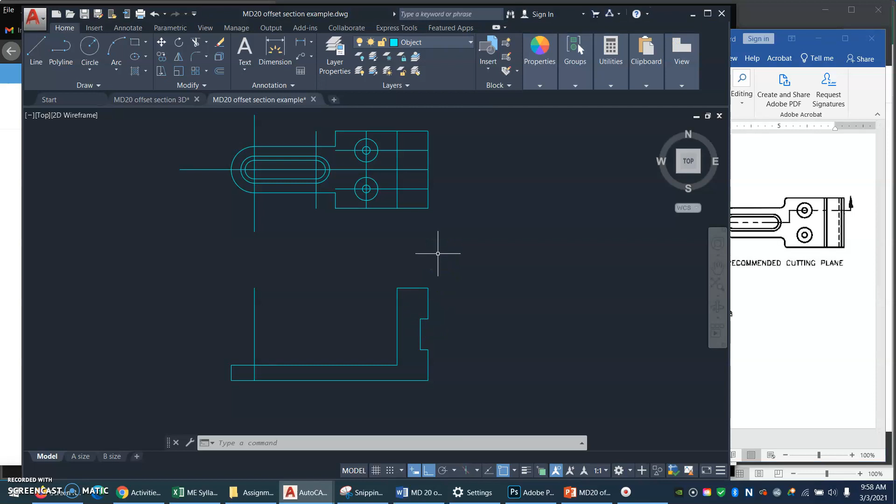So where is the chamfer? It's hiding under the fillet. Click that down arrow. Chamfer. All right, select first line. No, I don't know the distance yet. So click distance, and it is 0.125. Enter. Second distance is the same because it's a 45-degree thingy.

Okay, now I can click, click, enter to bring it back. Click, click, enter. Click, click, enter. Click, click, enter. Click.

Click, enter. All right, how about a fillet radius in there? Do we know how big that is? Unless otherwise specified, all fillets are a radius of 1/4. Right. Well, here's one that's otherwise specified. This outside corner here is not 1/4. The others are. So let's do this.

Let's get a fillet. So now it's hiding under the chamfer. Fillet. R for radius. 0.25. And what have I got? That is a fillet. That is a fillet. Oops, got to bring up the command again. Enter to bring up the command. Click those 2. Enter to bring up the command.

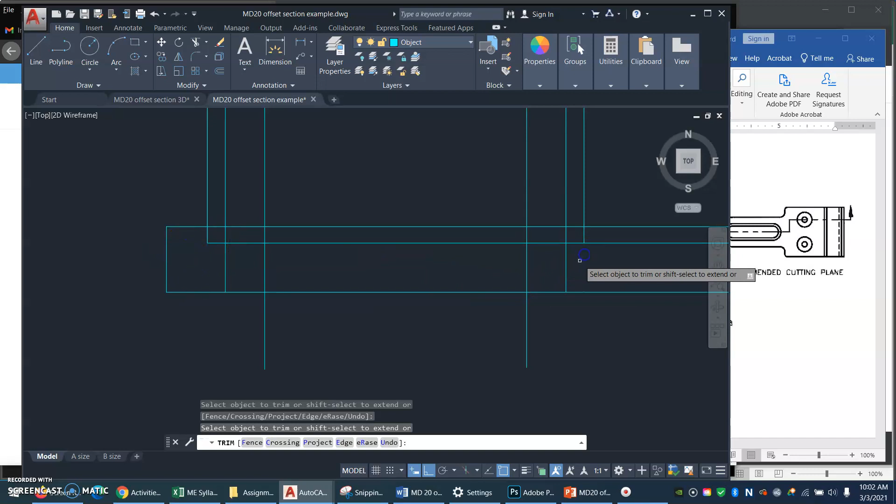Okay, now this counter bore is 1/8 of an inch thick, so O for offset, 0.125, and offset. Let me zoom in on my slot here so we can see what's happening, and let's do TR for trim. Enter again. I'll just use everybody for a, what you call it, cutter.

And I'll use a right crossing window to trim those guys up, and I'll trim that out of there. Oh yes, and now I'd like to move these to a hidden layer, so I'm going to select all those lines and then just go up here and click hidden. Great, and now I'm going to select these two lines and go up here and select center to move them onto a center layer.

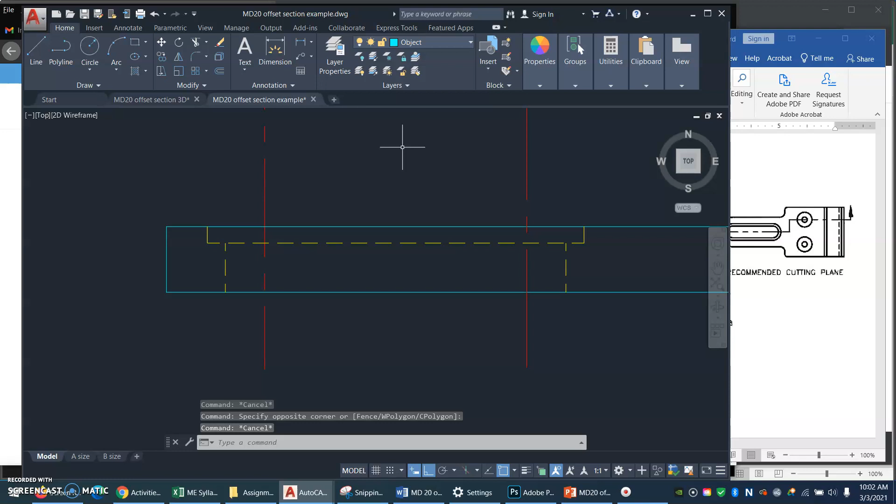All right, let's get our counterbore holes here. I'm just going to run... I could use offset if I wanted to. I'm just, what do you call it, running lines down.

Okay, and this one has a counterbore that is 3/16 deep, so 0.188. O for offset, 0.188.

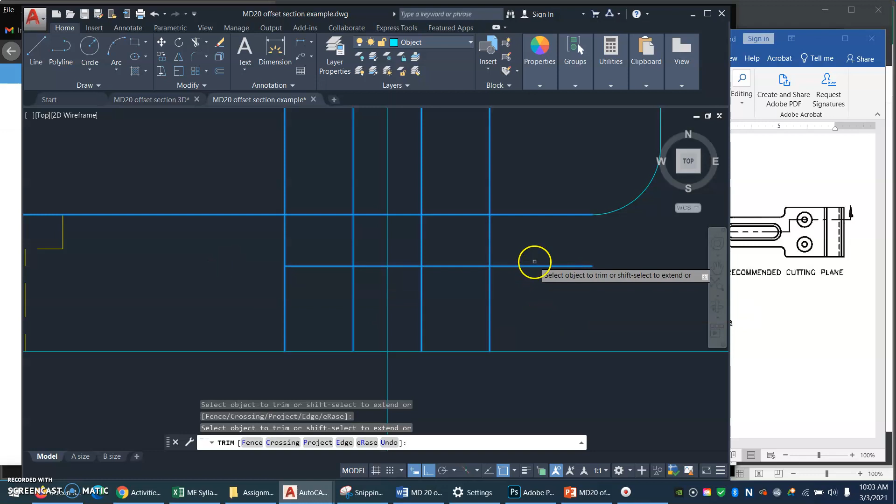Offset that line. Okay, now I'm going to come in here, zoom in close, and do TR for trim. I'll just hit enter to select everything as a cutter. Oh, that's probably stupid. Yeah, probably should. TR for trim, I probably would be smart to use these. Okay, so there's that.

Trim these. Trim that. Da-da-da-da-da. All right, now I'm going to select. That is a weird looking hole. The counterbore is large relative to the hole.

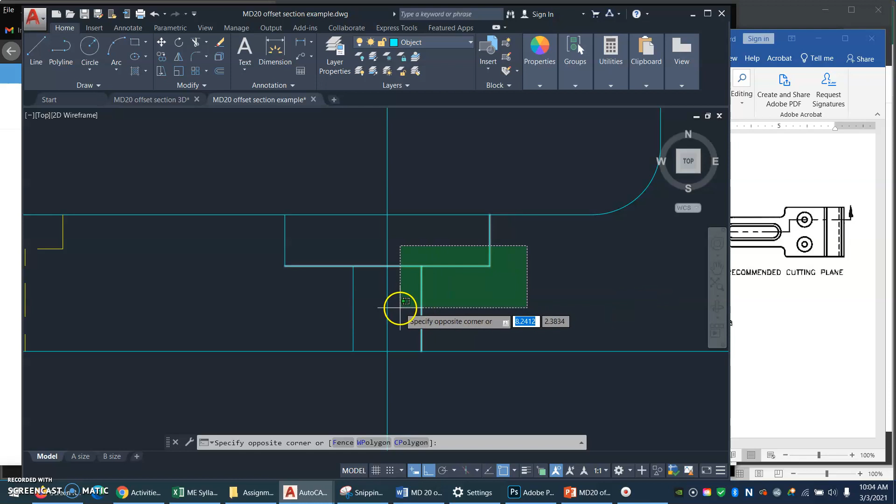I'm going to use a right crossing window to select these lines. Now they're selected. Now I'll come up here and click hidden. Escape. Now I'll select this line and come up here and select center. Great.

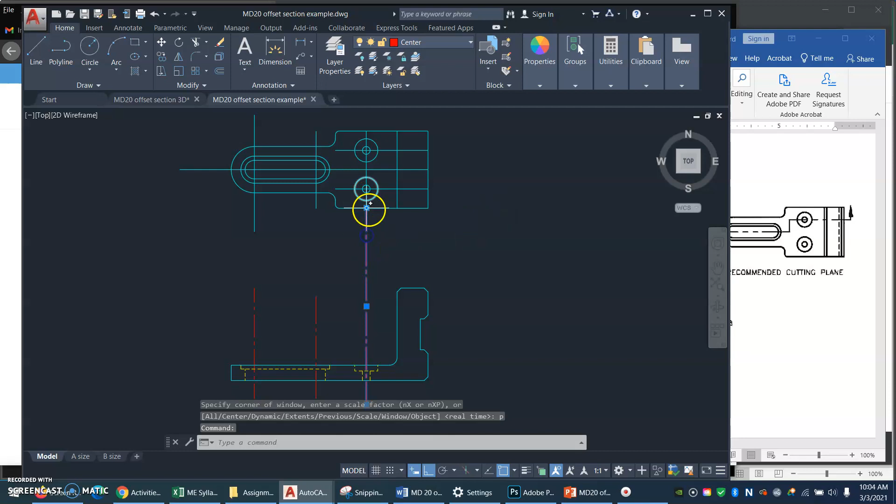Now, before I do too much, let's think about our cutting plane line, shall we? So here's our cutting plane line. If I were being careful, I might measure a nice distance out beyond there, but I want to make sure we have time to look at these, so I'm just going to eyeball it for now.

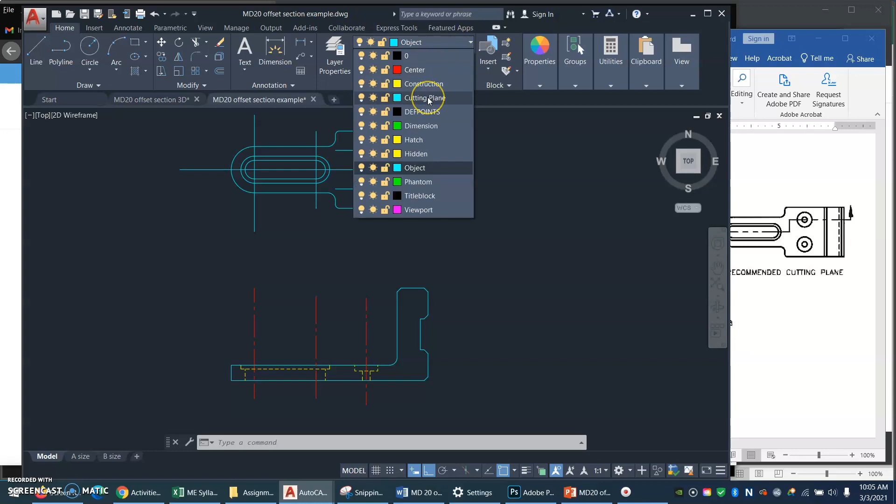I'm going to switch to the cutting plane layer, which is a thick phantom line. And what am I going to do? I'm going to extend this line out a bit. Okay.

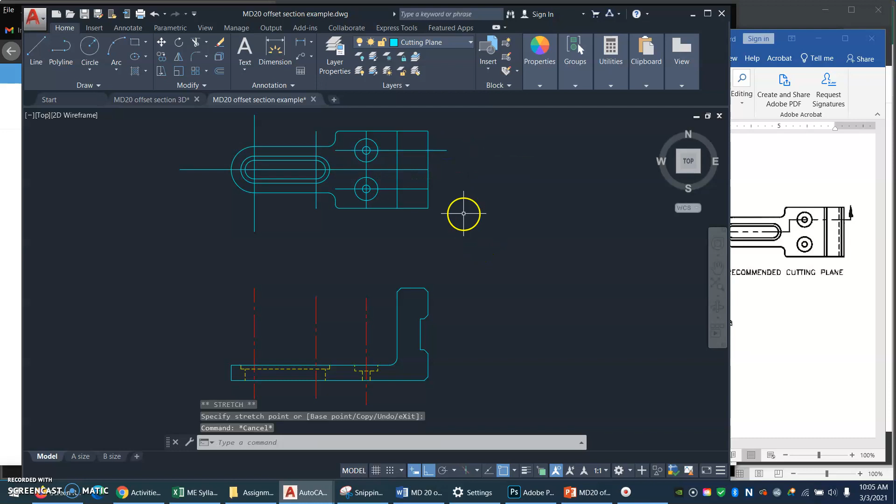Now, I need a leader style. So I'm going to go to the Annotate tab. Let me make this a little bit bigger. To Leaders, and get the leader style. There's the standard style. I need a new leader style. Leaders. Cutting plane. Continue.

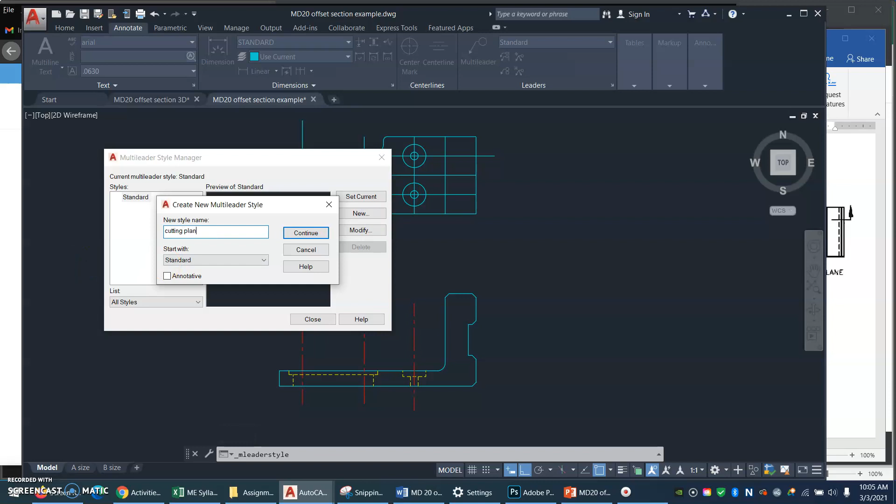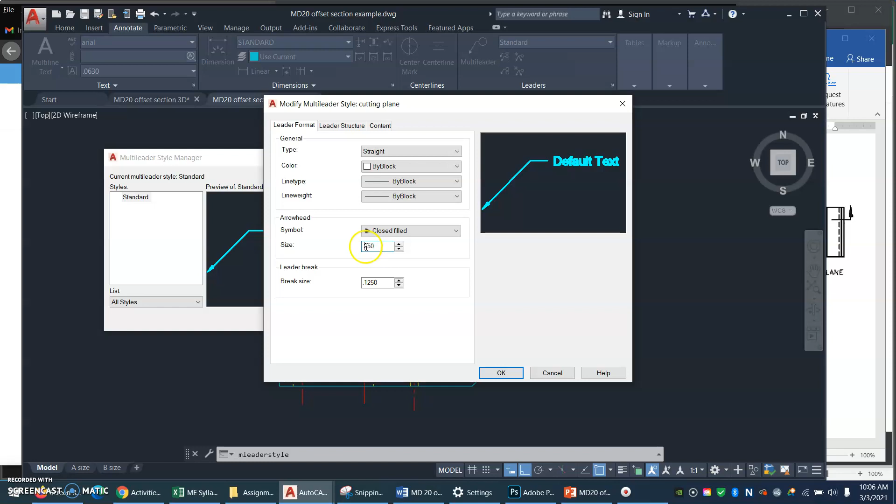Okay, now for this one, text, that's not what I want. It's not the arrowheads. Here we go, the arrowheads. For the cutting plane alone, I want my arrowhead to be 1/4 of an inch long, 250. Okay, and the cutting plane is the current leader style, so I'm good.

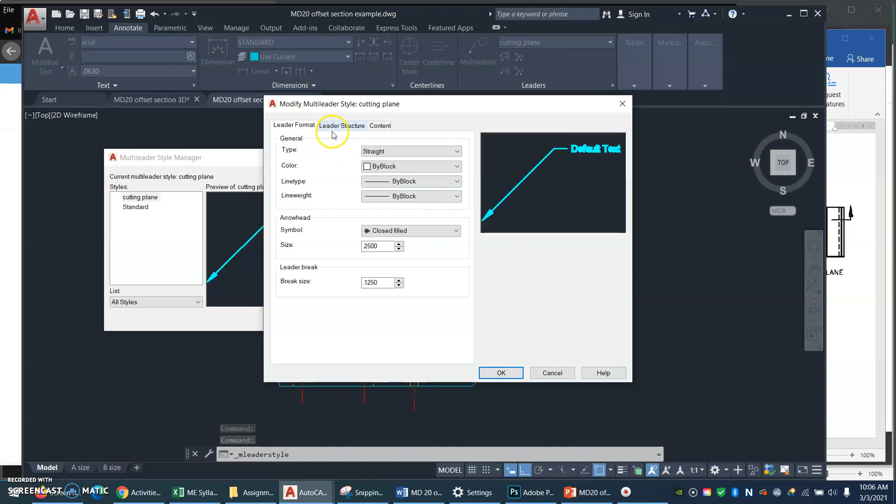Now, oh, you know what? I struggle with leaders. Let's go back to our leader style one more time, because what we should do is not automatically include a landing. We just want an arrow, thank you, that's all. So just an arrow, no landing. I hope this works. Close.

And I've got ortho turned on, which is smart. Now I will get a leader, click. I will come out here and just click somewhere in space and drag down to my line here. And I'm just going to get out of there. That's probably too long, isn't it? Let me move my arrow down a bit. Oh, please move.

Okay, and now I'm going to get a leader again. And can't get my green thing to show up. Oh well. And I'm going to make an arrowhead here and come down and be perpendicular. And now, because I goofed up a little, I'm going to do trim, TR, trim, enter.

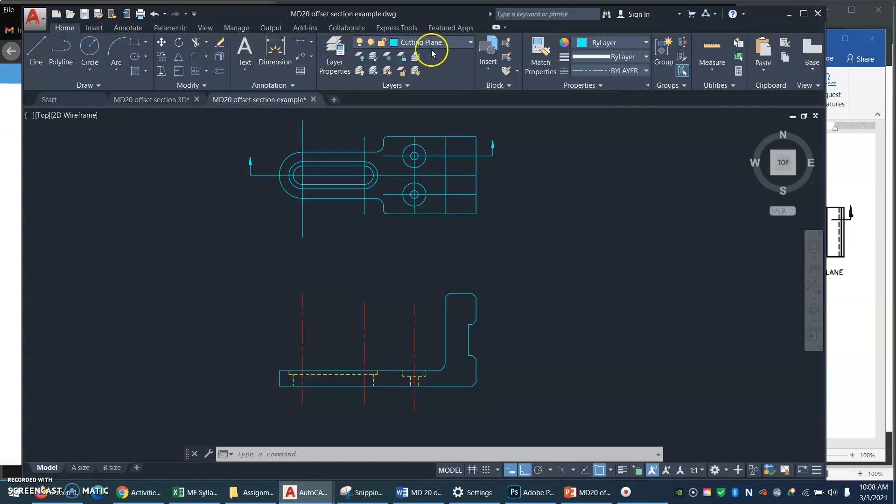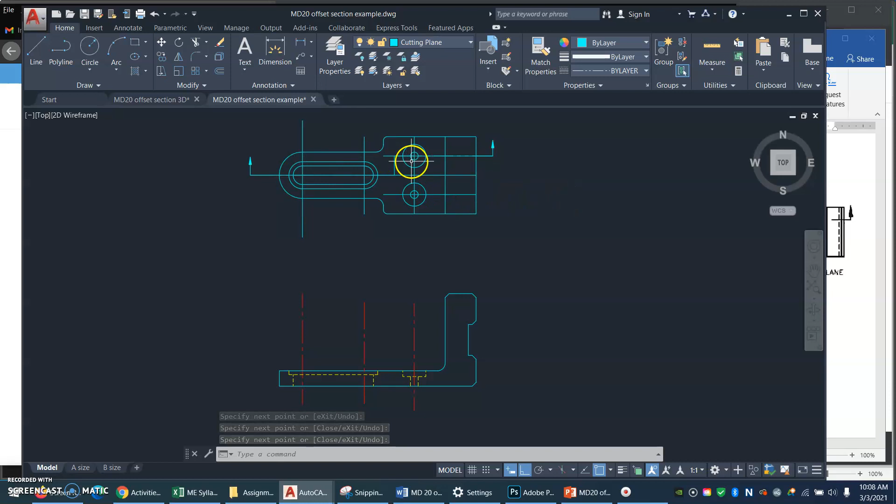Okay, now the only things that are on the cutting plane layer right now are those two arrowheads. So now I'm still on the cutting plane layer. Now I'm going to get a cutting plane line and go zigzagging around here. So L for line. I'm going to go over here, up here, over here. I do not want center lines under my cutting plane line, so I'm going to erase whatever that was, and I'm going to erase whatever that was. We don't want it in there. Looky there! Our cutting plane line has appeared.

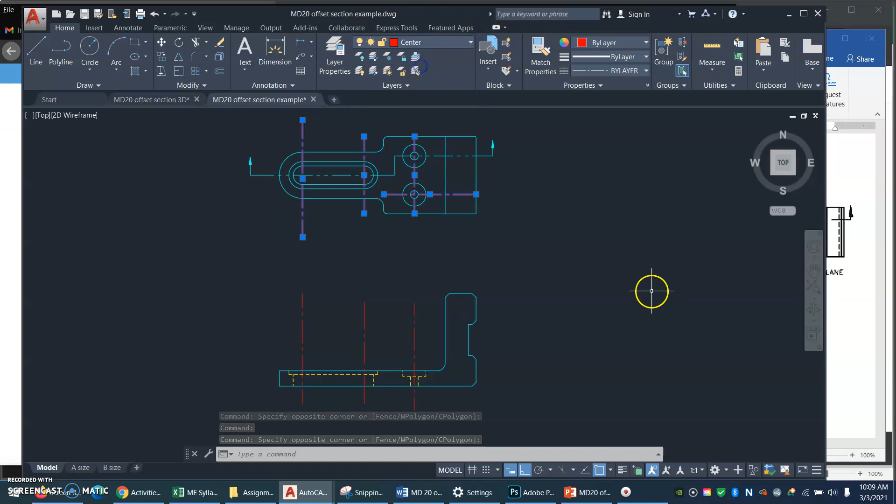And now I should trim up these lines and turn them into center lines. I need to shorten them, of course. They're not looking right now. But I wanted to go over to our paper space while we still have a minute and see what scale we should use. So I'm going to open the viewport by double-clicking.

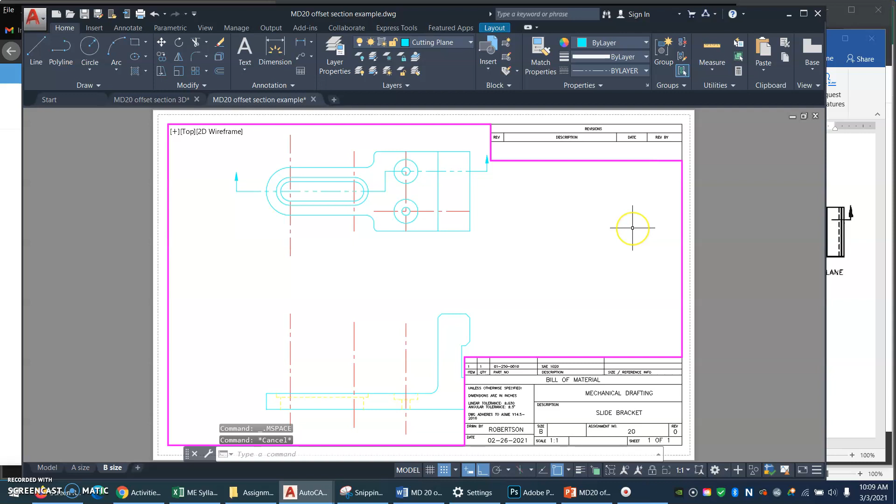This is a scale of 1:1. That's probably not going to work. So we probably are going to need 1:2. Well, you know what? Maybe it would work. Maybe it would work. What if we move these guys closer together? Do you think that would work? Probably not.

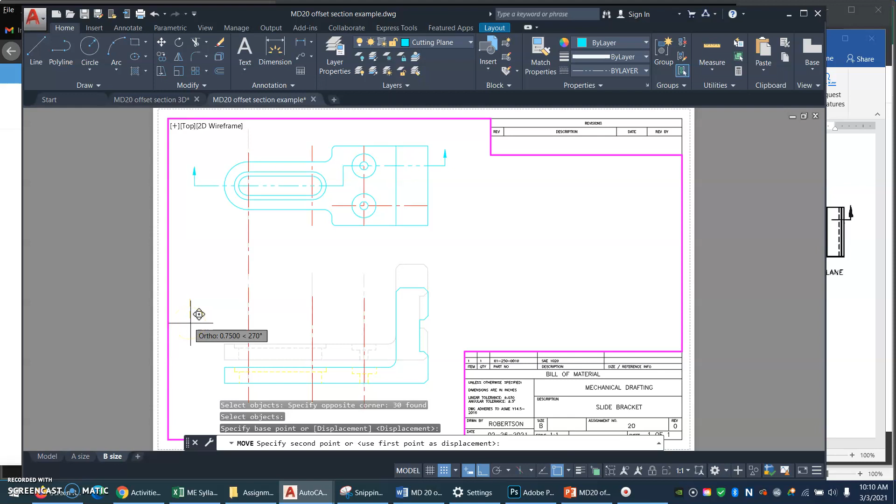I really would rather just do full size. It might. It just might. I'll move this down just a little bit. One-to-one might work. Okay, so that means that our dimension style and leader style will stay at a scale of 1:1. Whew, we ran out of video time.